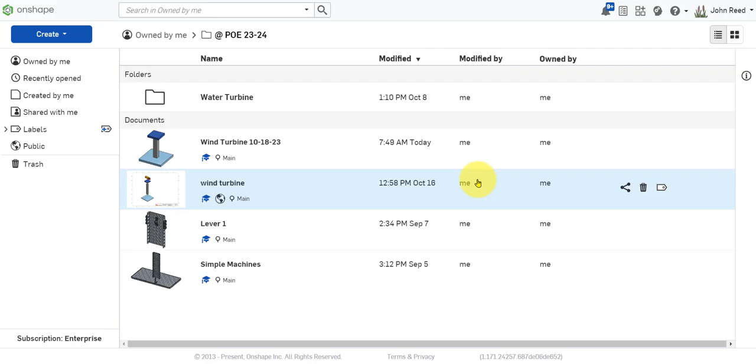So I'm going to make a new document. I'm going to call it wind turbine, and I've made a lot of these, so I'm going to just give it the date today and a letter. That's the name of my document. I'm going to come down to the Part Studio and rename it to wind turbine, structure maybe.

Since it's not going to be the entire wind turbine, I'm going to check my units. Workspace units are in inches, which is what I want.

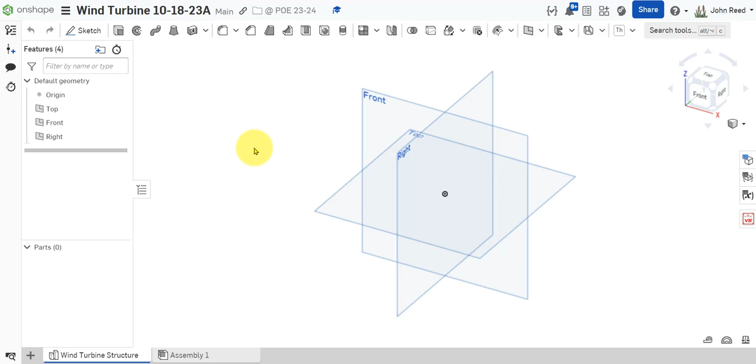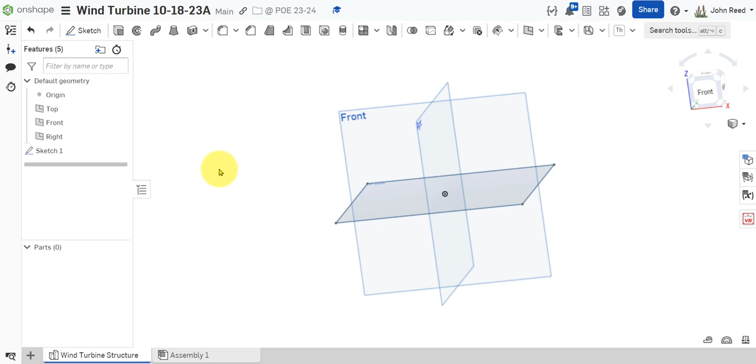So I'm going to place my first sketch on the top plane. Press N to get the sketch plane perpendicular to you. Come up here to center point rectangle, and I'm going to make a 6 by 6 square. That's going to serve as the base of our structure. So I'm going to press P to get rid of the sketch planes, or the origin planes, I don't need those.

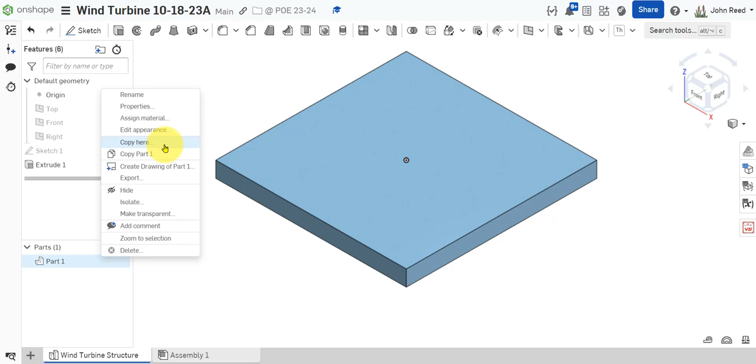And I'm going to extrude downward the other way. We're going to be using probably 1/2 inch plywood, so I'll call that a 1/2 inch and press Shift 7. So there's my base, a 6 by 6 piece of 1/2 inch thick plywood. I'm going to rename my part here and call it the base.

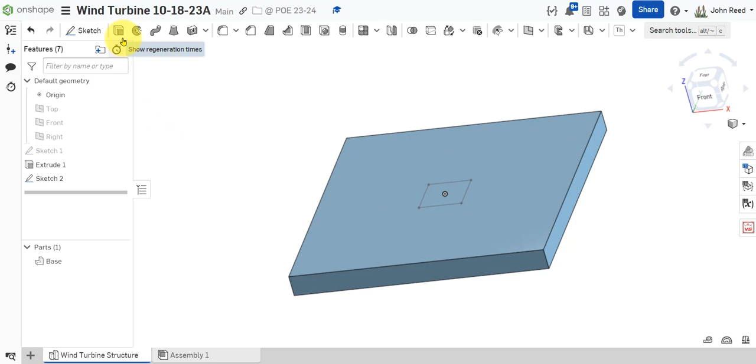And I'm going to place a sketch again on this surface, and now I'm going to make what I'll call the column. So that's going to be a 1 by 1 structure. So I'm going to make the sketch and then extrude it upwards, and I'm only going to go up about 6 inches. We don't need this to be super high, because all we need to do is make sure we elevate things so that the blades of the turbine don't run into the table. So that's why we have the column.

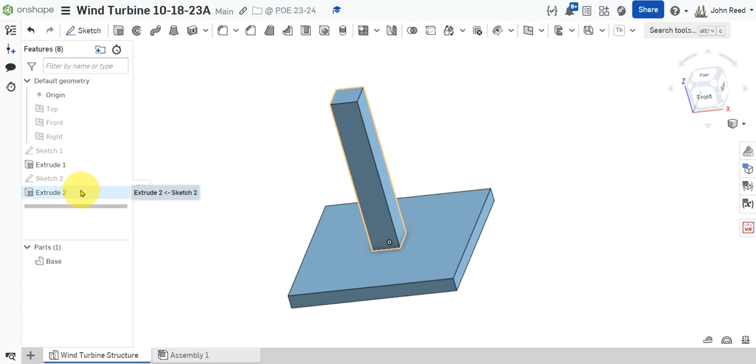So actually I wanted to do something a little different there. I'm going to double click on the extrude to edit it, and instead of adding that to the existing part, I'm going to create a new part and accept that, so it changes color. And I'm going to come down here and rename this to the column.

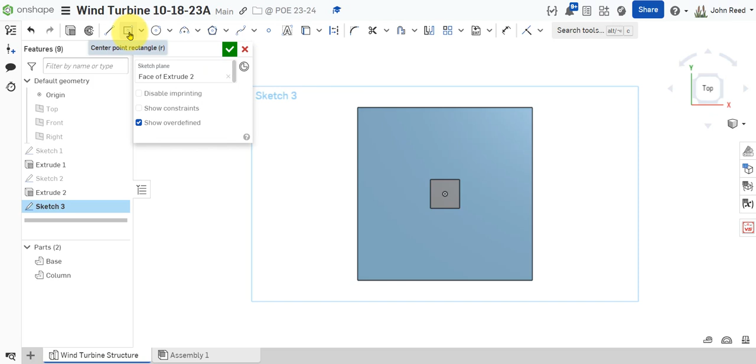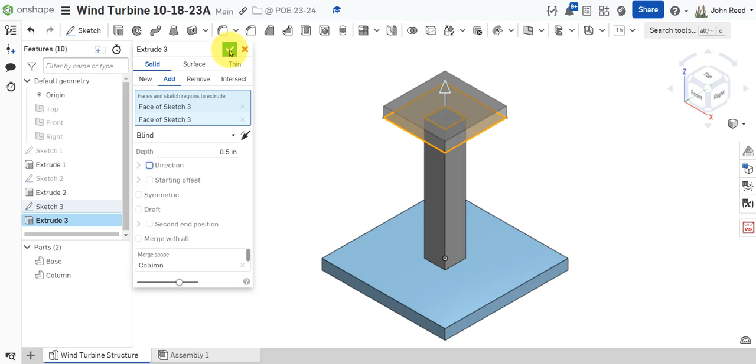And I'm going to then place on top of the column another center point rectangle, and make that about 3 by 3, and accept that. Shift 7 puts me in isometric so I can see what I'm doing. And then I'm going to extrude upward, and this is going to be just a little platform to put stuff on. We may not even need it due to the small size of our generator.

But I'm going to put it there. And once again, I forgot to come over here and make sure that, on the extrude dialog box, I change that to new. So that's a separate part, and we're going to rename that to platform.

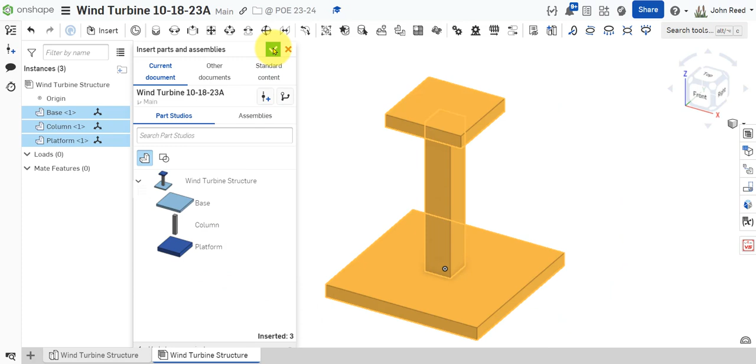So those are my parts, and I'm now going to put them into an assembly, and I'm going to have that assembly be named the same thing, wind turbine structure. I'm going to insert the entire part studio in there, and instead of clicking out, I'm going to click immediately on the green. That'll put it at the origin, and then I have to have one part in the assembly fixed. So I'm going to right click on the base and call it fixed, and then I have to mate these together. So I'll grab them all, come up to group mate and accept that. Now they're all stuck together.

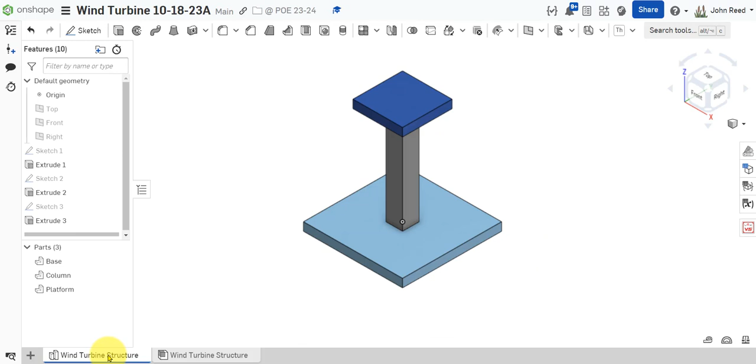Now why would I have to go to this trouble? Because the Part Studio looks similar. Well, we want to make an assembly drawing, so we want to make what's called an exploded view.

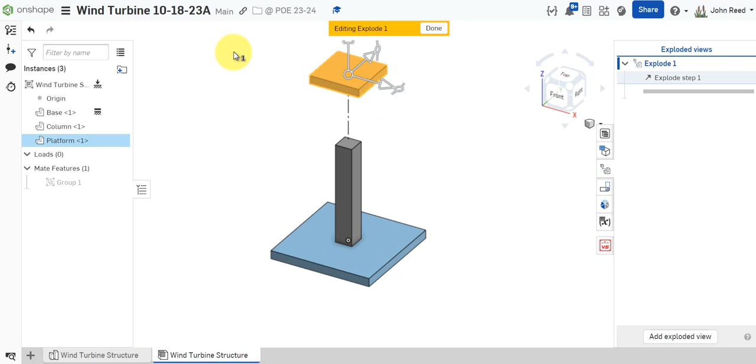So I'm going to add an exploded view here, and that allows us to sort of take this apart. If I click here and come up, let's say 4 inches. And this one I'm going to take down 4 inches. What this does is sort of disassemble my structure so I can see how it comes together.

Even though it is a very simple structure, more complicated assemblies definitely benefit from doing this. So we're going to leave it like that.

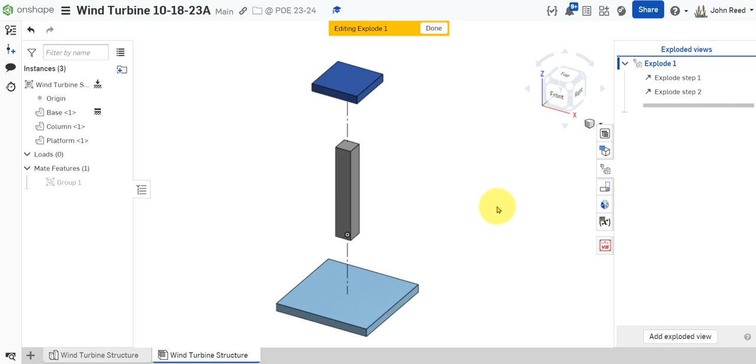Now I want to make a bill of materials table, a BOM table. So I'm going to click there and take a look at what I have already. So I don't have a part number, so I'm going to remove that column. I'm going to remove the description, but I am going to add the name, so that's going to be the part name. So I'm going to have item number, quantity, and the part name.

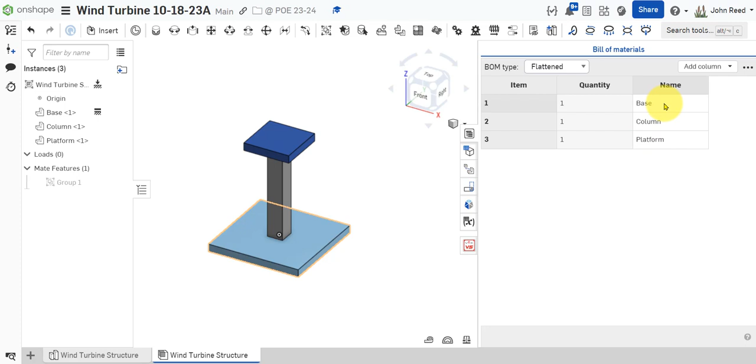Okay, so now that I have that, I can right click, insert this, or create a drawing of this wind turbine assembly. And I'm going to use a size A paper with inches as the units, so I'll accept that. And as I place this into the drawing template, I'm going to have an isometric view, and it's going to be an exploded view, and it's going to look something like that.

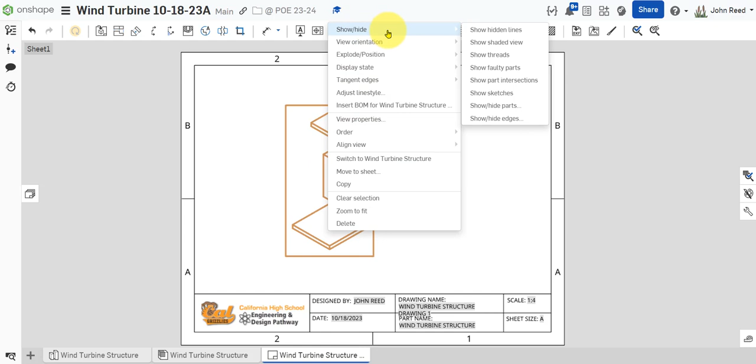So there it is. I'll right click, show shaded views, so I can get the color there. And now I'm going to insert the BOM table in there, and I'm going to have it attached down here in the lower right. So there it is, it's got the item number, quantity, and name.

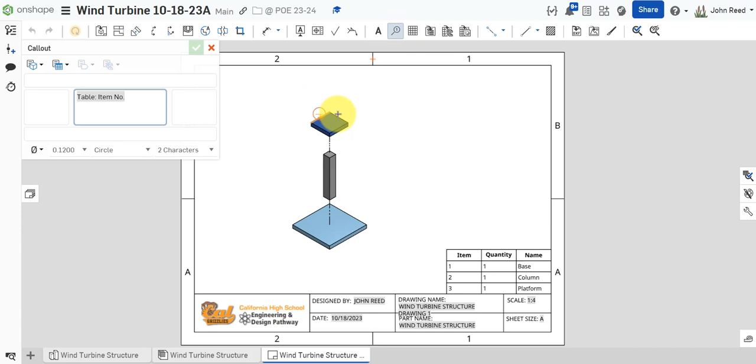Finally, I want to add some callouts. These should be attached right at the edges of your parts. Let's do that one over here maybe, and maybe this one over here.

And that's going to be a way to present your structure in a very clear, understandable way. It is a little bit of overkill for a structure and assembly of this simplicity. Nonetheless, it clearly shows how it comes together, and this is a good way to present your design. So thanks for watching.